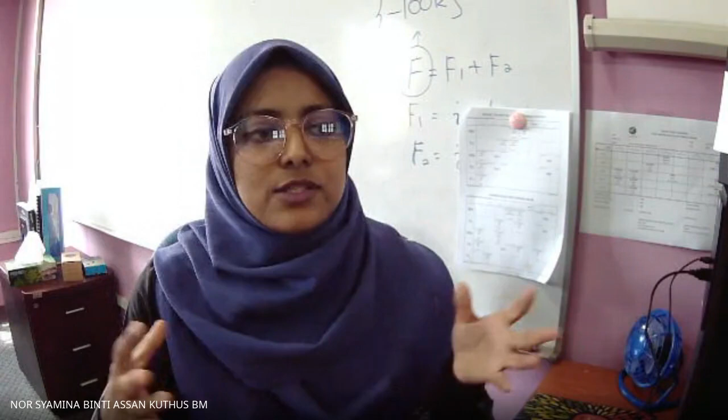Other than that, apa yang kita akan buat dekat bengkel-bengkel, dekat workshop adalah kita akan pergi bengkel mechanical untuk buat welding. Kita akan buat arc welding, kita tak buat gas welding. Lepas tu kita insyaAllah akan buat DC circuit ataupun AC circuit punya eksperimen. Dan untuk civil kita akan buat slump test. Slump test itu nanti dia boleh lah bancuh konkrit, main dengan semen awak tu, dan kita akan buat slump test.

Ini secara keseluruhan what we're going to do for this semester. Okay, so any question nak tanya?

Okay, sekiranya awak tak ada apa-apa barang untuk LK ke apa pun, don't worry, sebabnya kan kita ada space hopefully. So kita akan buat bilik LK. So bilik LK nanti kita bolehlah gunakan whatever instrument yang ada dekat situ untuk okay. So next week kita akan jumpa di bilik LK.

Untuk hari ini saya bincangkan teori sahaja dulu. I'm just going to explain to you the theory of mechanical drawing, which is using drawing section views. So next week apa yang kita akan buat adalah kita akan, apa yang kita belajar hari ini kita akan praktikkan minggu hadapan. Boleh?

Ada apa soalan? Tak ada? Ready? Nak belajar? Ready, Miss. Ada tak antara yang ada dekat sini pernah buat mechanical drawing?

Saya rasa pernah belajar dalam form 5 kot rasanya section views tu kan? Ada tak yang pernah belajar? Tak pernah buat section view, you know what is section view, you know what is mechanical drawing? Belum. Ya, apa dia? Apa dia? Siapa cakap betul ni? Dia punya speaker ni, dia macam bergema sikit. Jadi awak punya cakap kena clear sikit. Okay. Tak pernah lagi, Miss. Benar, okay. Okay. Kita

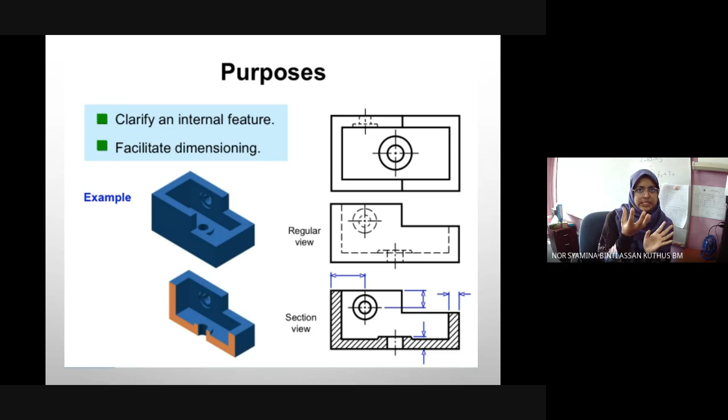Jadi itulah yang kita nak buat. So bezanya, kita tengok apa beza antara orthographic view dengan tu. What is the purpose? Obviously to clarify internal features dia and also to facilitate apa-apa dimension yang diperlukan di bahagian dalam. Contoh kat bahagian dalam tiba-tiba ada a part that is hollow ataupun a part that needs to be clearly fill ke apa, so kita nak tahu exact dimension ke. For that, we can use this section views. Purpose nanti tidak lagi saya tunjuk.

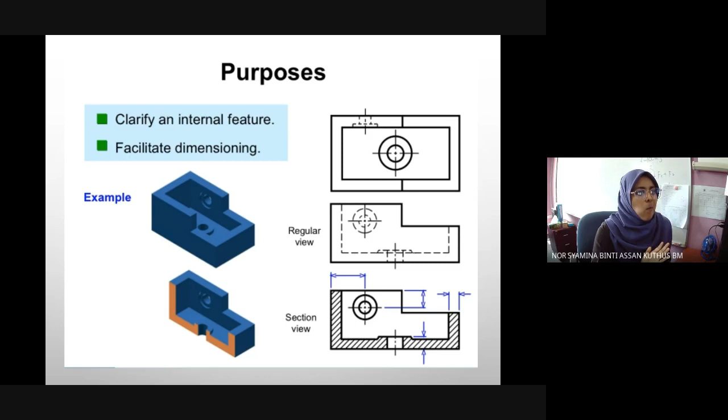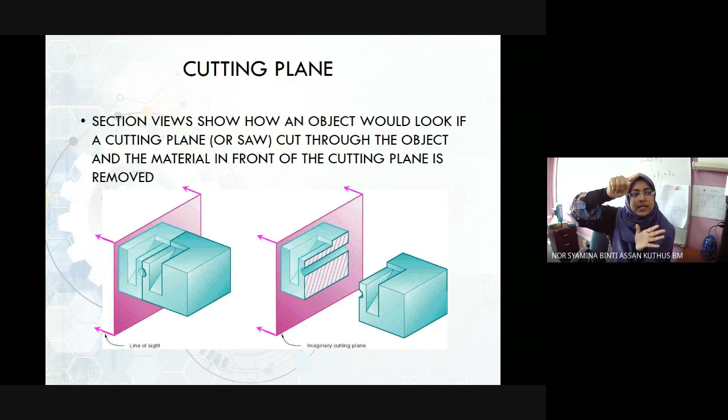Okay, senang. Untuk bila mana kita buat section views, we would actually have a cutting plane. So cutting plane ni adalah imaginary plane sahaja. Now in this slide, what they are showing you is how would we view the object bila mana kita nak lukis. So contoh kita ada objek dalam warna hijau tu kan, objek hijau itu and we are cutting through the object.

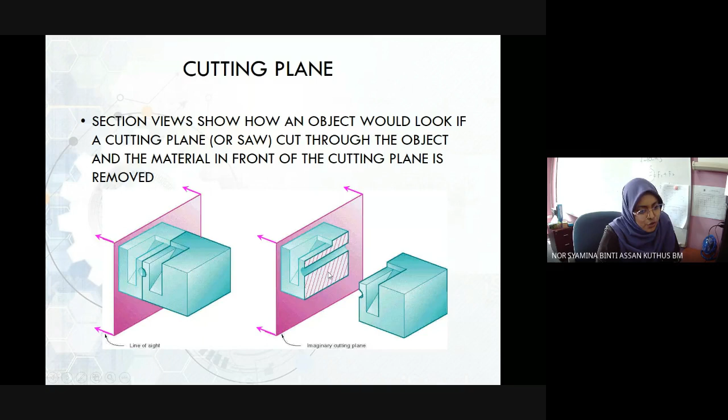So cutting through, where we are cutting through is what the pink color panel itu sedang tunjukkan itulah. So this pink color panel, nampak ke saya punya mouse? Yang ni okay. So yang pink ini adalah seolah this is where we are cutting. So after we cut, this is how kita tengok daripada sini tengok arrow ini, this is how we look at our object. So that is what will be drawn. Itulah yang akan kita lukiskan sebagai salah satu section view. Okay, bukan side view, bukan front view, tetapi section view.

Alright. So cutting plane ini sebenarnya imaginary sahaja. So we just imagine that we're gonna cut through, we're not gonna like literally cut through. So dia adalah imaginary plane yang di mana we assume that is where we cut through and we are going to obtain our section view. Alright. So cutting plane ini boleh berlaku in any direction. Obviously kita tengok pada kita punya intention, kita nak tengok which internal features yang kita nak tengok. So based on that intention, based on our objective, kita akan dapat cut through dan we can actually place our cutting plane line itulah based on where we need it.

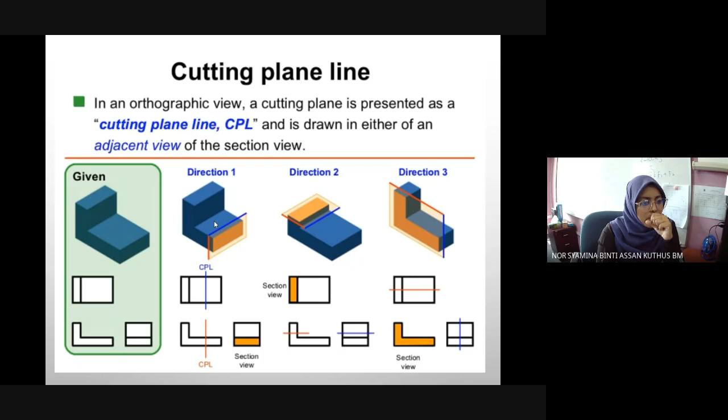Okay, section line technique. So apa ini section line technique? Bagi balik depan, okay, nampak tak? Bila kita lukis yang hijau ini, nampak belah kiri ini when we are drawing the side view. Okay. Front view, kita tahu dekat dalam dia ada bahagian yang hollow. So dia akan represent that particular part which is inside, which is hidden, menggunakan dotted line.

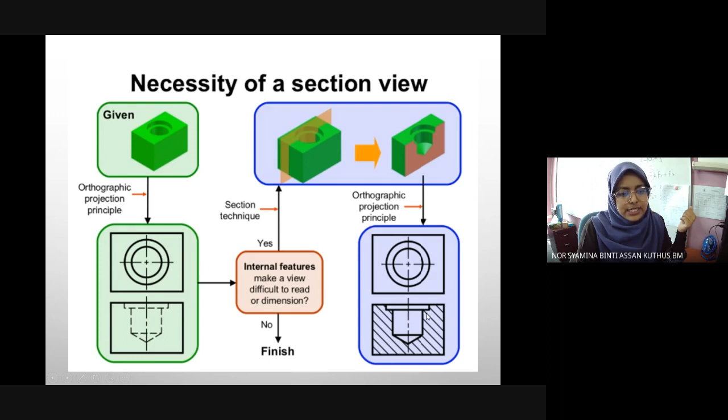Betul? So what happens after we cut a section of the object, to indicate that is a section view, to indicate that is the part that we cut, kita akan menggunakan this shaded lines. This is called section lines. Nampak line ni yang dilorek-lorekkan ini, this is section line. That is to indicate itu adalah part yang di mana kita potong. That is where the cut has taken place.

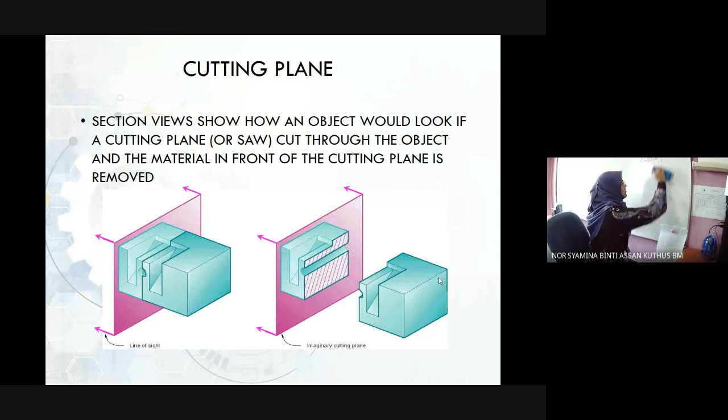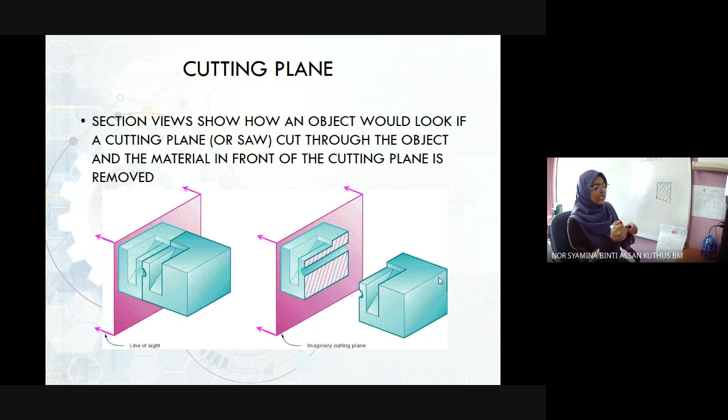Faham? So nak lukis dia pun bukannya sekadar kita tak boleh nak assume. Okay, kita boleh nak assume kita lukiskan objek kita dan lorek je sehati kita, lorek je. Tak boleh macam tu. Dia ada dia punya method, dia ada dia punya style, dia ada dia punya angle that we need to follow. Kalau salah, the whole thing. Okay? Alright.

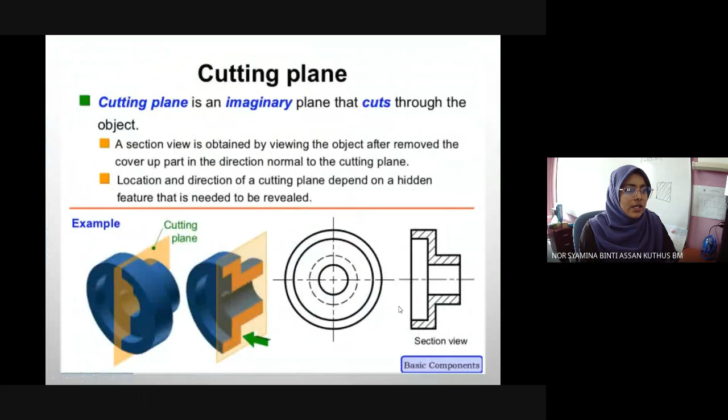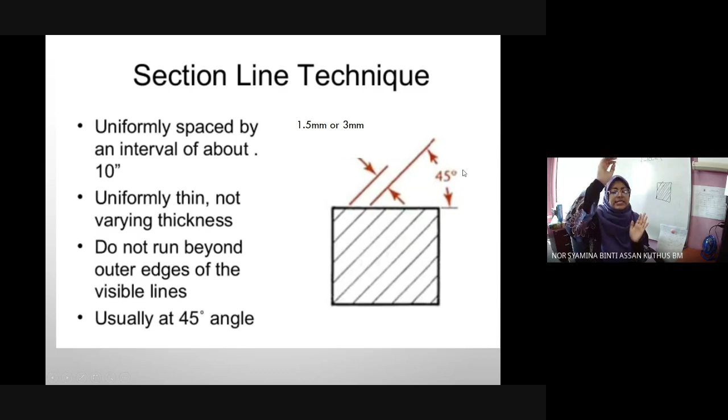If your object is very small, then your section line interval should also be small. If our object is big, we can use 3 mm. And the angle that we want to draw must be 45 degrees.

It's not restricted to 45 degrees only. Later we'll see there are conditions where you can change from 45 to 30 degrees or 60 degrees, but there are other conditions. Your first priority is that the section line must be a very thin line.

There must be a difference between your section line and your object line outside. These are your object lines, the darker lines, the bigger lines, the visible lines. The outer ones are object lines. There must be a difference between this object line and the section line inside.

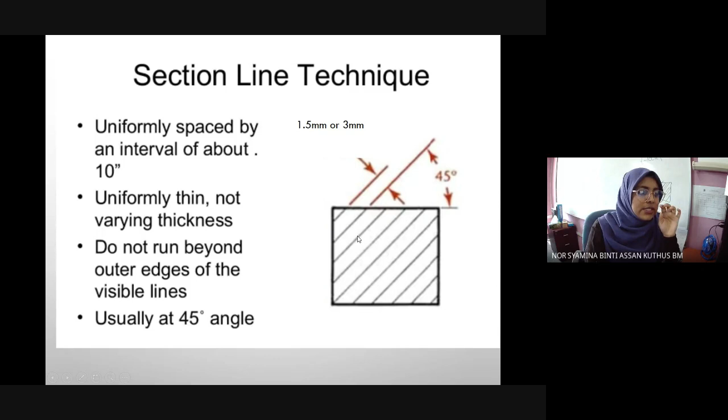It should be very clean. The first thing when we are doing our engineering drawing, your paper must be very clean. Your drawings, your lines should be very precise and clear.

If you want to know, because you submitted your LK SEM 1 answer as a soft copy, not hard copy, maybe I did not pay much attention to the cleanliness of your paper and neatness of your line and everything. But this time I will make sure when we do face to face, I would be able to see and tell you exactly if your lines are not clear, not precise, not nice, if it looks smudgy, if your paper is smudgy, not clean - all of that is wrong in engineering drawing.

Your line must be very crisp. It cannot, at the end, come out a bit like that when we have an object line - the intensity of the line must be the same, the lightness of the line must be the same. All of that matters, you have to be very careful.

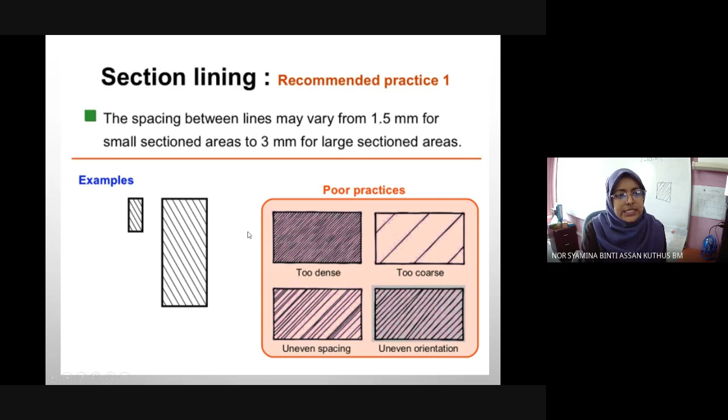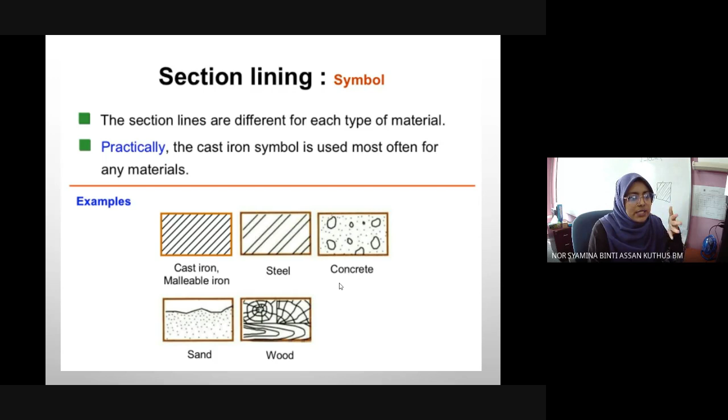For steel, when you study structural analysis or similar, all of this is in materials - you will learn later to indicate the differences between types of material. In any engineering drawing, we will use these particular symbols, but we will only use the basic, common section line lining.

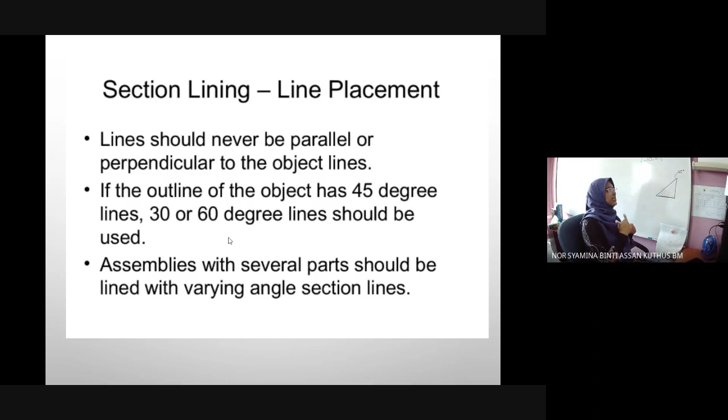This particular object line is already at 45 degrees, so then we can change the section line inside to either 30 degrees or 60 degrees.

Okay, and another thing is when we want to change the angle, we must also change where we are placing the lines, because the line should not be parallel to the object line. We cannot draw it straight like that - we can change it.

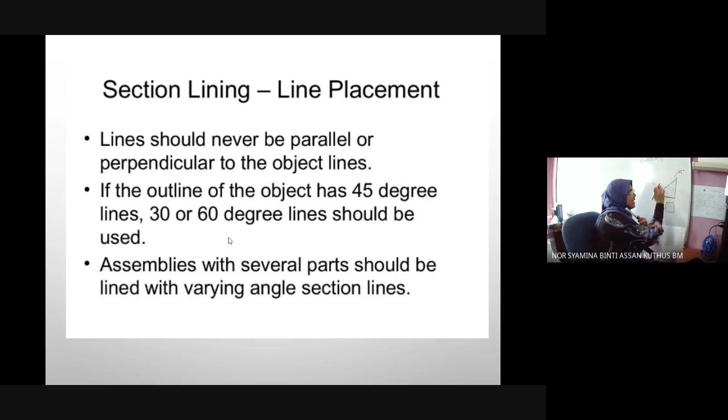Like this. Can you see? This particular line is not parallel to any object line. It's also not perpendicular to any object line. You see what I'm saying?

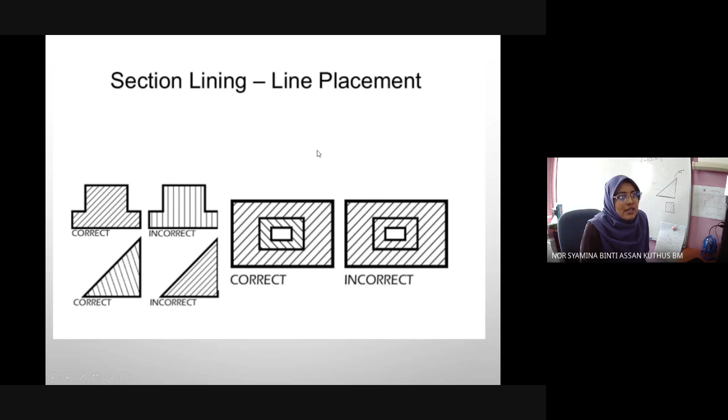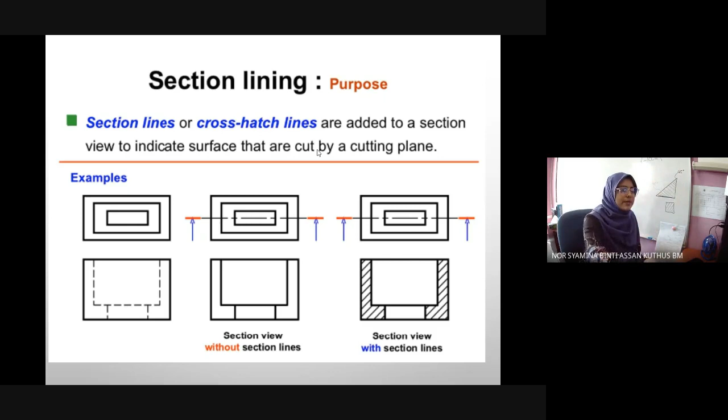Okay, so next, the purpose of why we need to draw section lines is to indicate the surface that are cut. We need to know where the cut has happened, where is the area that will be cut. That is the big idea.

Okay, siapa? Ini lagi contoh. Should not run parallel and perpendicular. Contoh macam ini, macam ini. Boleh, nampak?

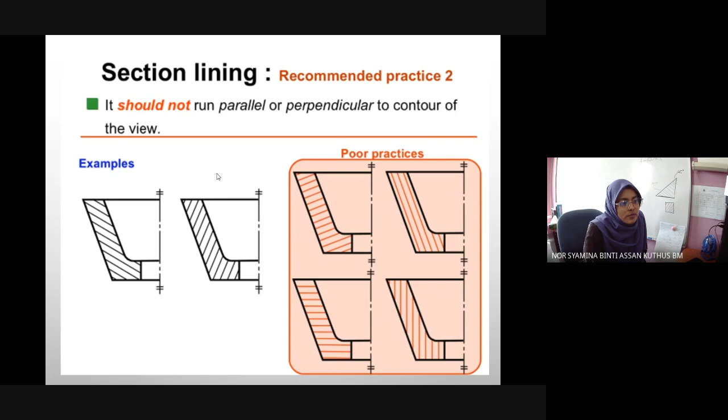Ini ada lagi contoh. Contoh lagi.

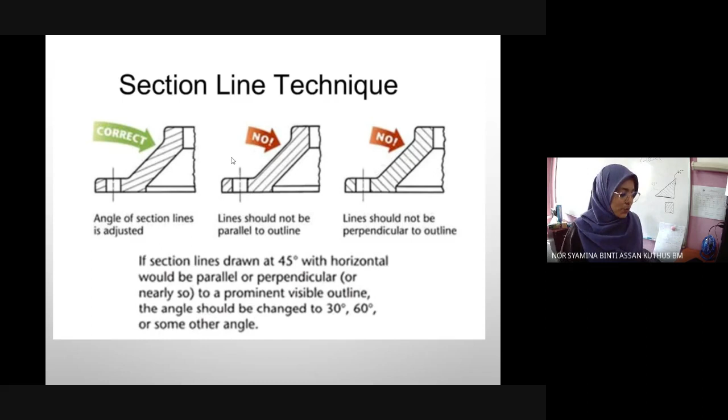Alright, so apa yang kita belajar tadi adalah what is section view dan apa yang kita perlu buat untuk indicate those section view. Now, what we're going to do is look at what types of section cuts there are. Berapa banyak jenis yang ada? Yang kita akan belajar sekarang adalah 3 sahaja.

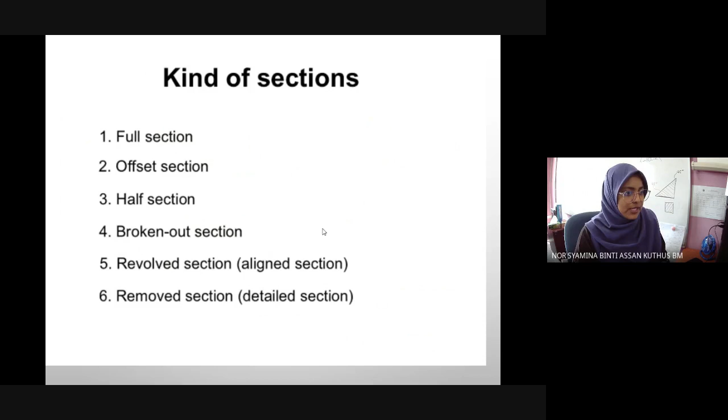Full section, offset section dan juga half section. So what is full section view? Full section view itu adalah di mana we have an object, we cut through the whole object. Kita terus potong straight macam tu dan kita tengok apa yang ada dekat dalam. So ini adalah full section view.

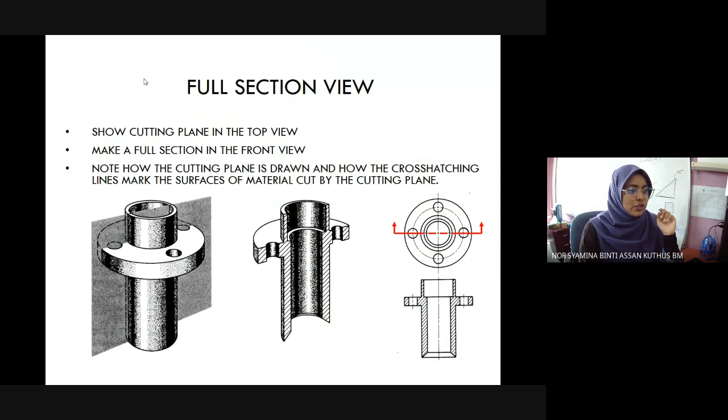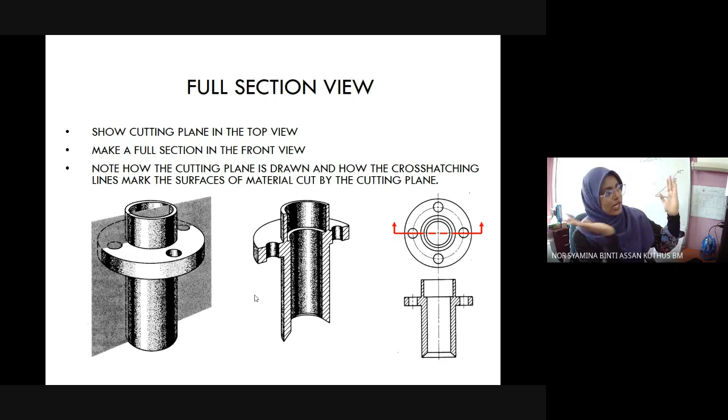Contoh, so we cut through straight. Tak ada kona-kona, kita tak pusing. Kalau ada pisau, contoh kita ada cake, kita potong straight, half. So kita tengok apa yang ada dekat dalam. Alright, ini full section view.

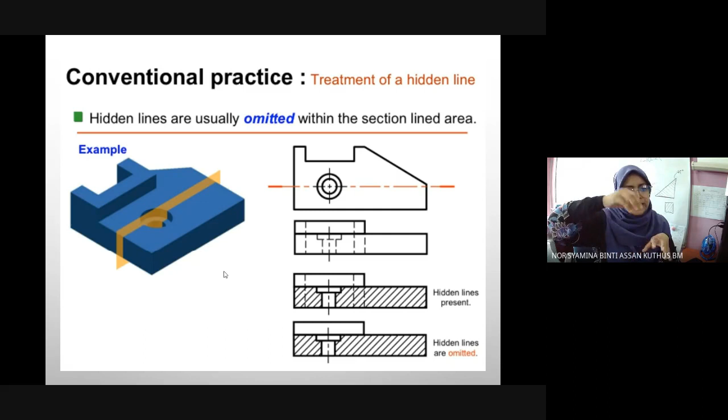Another one adalah, okay semua nanti saya akan tunjukkan waktu kita buat hands on. So bila kita dah potong, contoh ini, hidden lines are usually omitted. Nampak tak kita ada satu objek? Bila kita buat satu full section, sebelum itu, if we are going to view from this side, let's say ini adalah front view, kita tahu there's a hollow part.

Bila kita lukis that front view in our orthographic view, kita akan lukiskan dia sebagai hidden line, betul tak? Tetapi when we are drawing our section line, our section view, logiklah kan. Tadi dia hidden sebab kita tak nampak dia ada dekat dalam. Sekarang kita dah potong. So hidden line itu semua akan hilang. Faham ke?

Inilah maksud dia kat sini. Hidden line ini tidak perlu ditunjukkan. It's not needed. We can see this part. So tak perlu. Faham ke?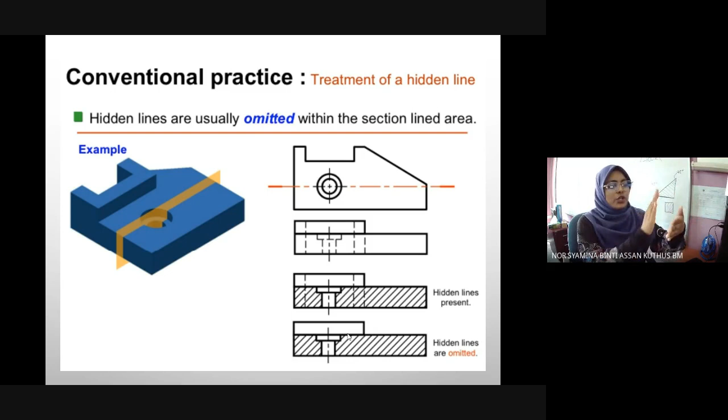Nampak, indicate daripada yang belakang, nampak tak? Ini part yang belakang punya hidden line pun tak perlu tunjuk. Faham ke? We are not going to view the whole view. Kita cuma nak tengok part yang kita cut sahaja. That is the purpose of drawing section view. Kita bukan lepas potong pun kita nak tengok semua details dekat belakang-belakang. No, we only going to see the part that we cut. Itu maksud dia dekat sini.

Alright, next. Ini contoh lagi full section. Another one type of section view adalah half section view.

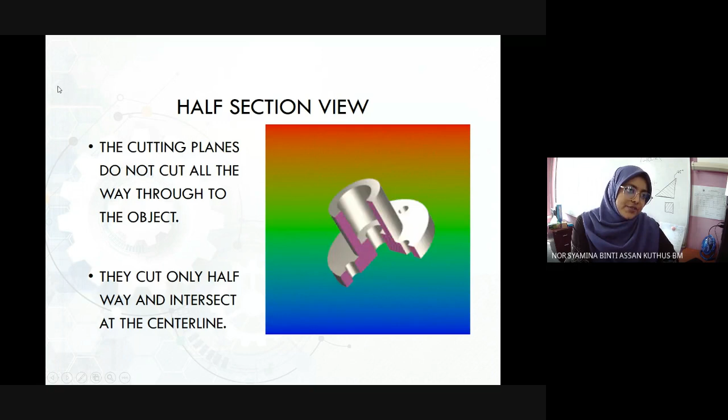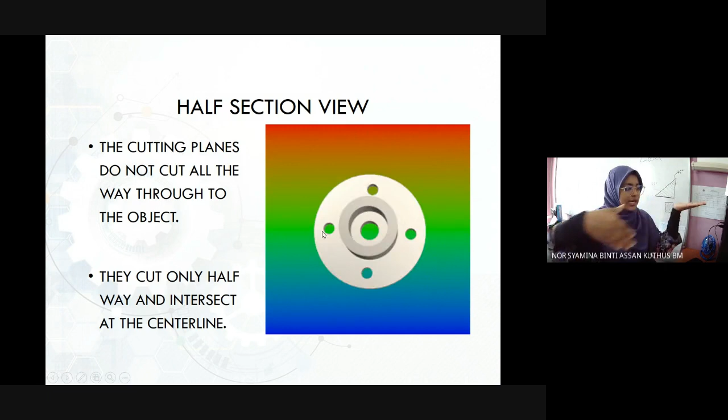Half section view ini hanya untuk symmetrical object. Ini contoh, nampak tak dipotong dekat mana. Dia tak potong keseluruhan. Okay, contoh kita ada kek. Ada kek tak? Okay, kita ada kek, maksud kita nak potong. Kita potong kek, kita tak potong straight.

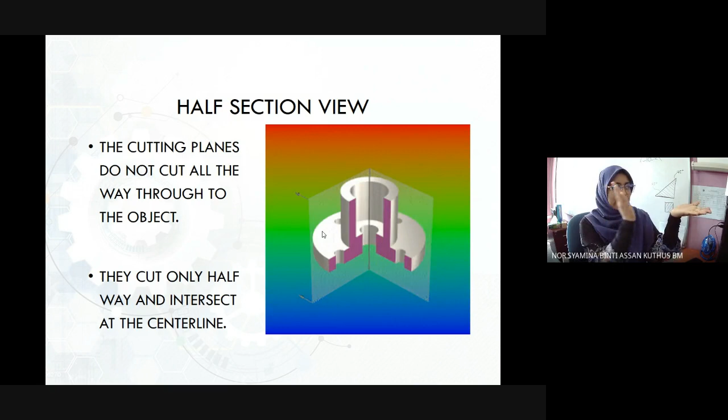Kita potong just a quarter of it, betul tak? Potong sini sikit, sini sikit, a slice kan. Samalah half section ini pun, kita ambil, kita keluarkan a slice of it dan kita tengok apa yang ada dekat dalam. But this cut can only be done for symmetrical object.

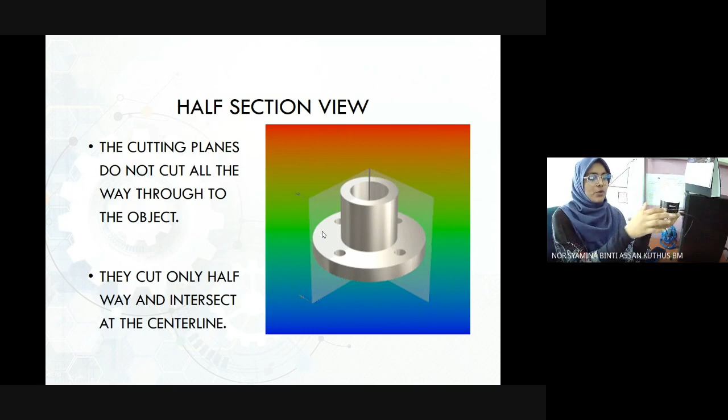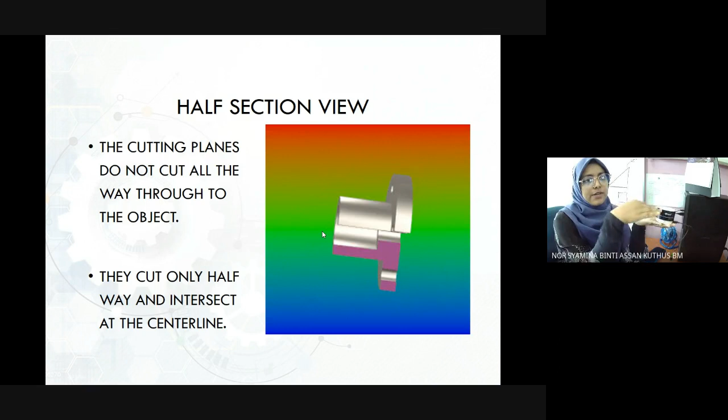Bermaksud saya potong, contoh nampak ini. Kalau ini symmetrical kan, saya pusing macam mana pun dia tetap benda yang sama. So potonglah belah sini, a slice this side. The section view will still be the same kalau saya potong belah sini pun. Itulah half section, nak kata it must be symmetrical punya object.

Ya. Contoh, symmetrical punya object, tapi dia cuma ambil section of it. Nampak this red line ni? This red line indicates where the cut has happened. Okay, this is where the cut has happened.

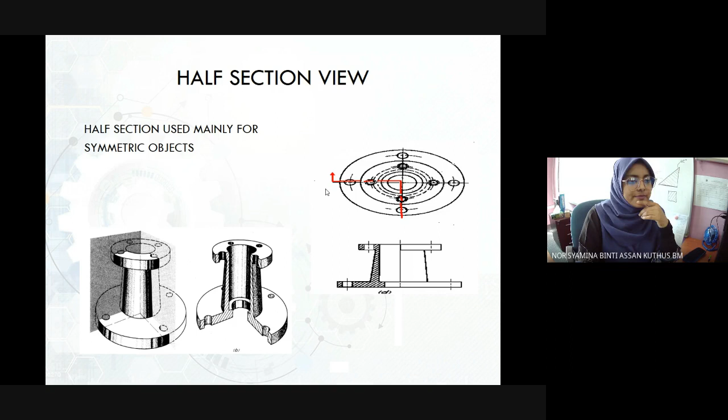Clear? Alright, ini contoh satu lagi. Mana it's been cut, the cutting plane is this side, dia potong begini. So the section view adalah halfway sahaja dan kita keluarkan a quarter of it.

Center line is something we use to separate. Like this example here, this is a section line. Per section line we will have a center line. Center line is to indicate where the cut has happened. For half section it is very important because it's symmetry, so we need to know the center point used to cut the object halfway. So you need to indicate it with this red color line.

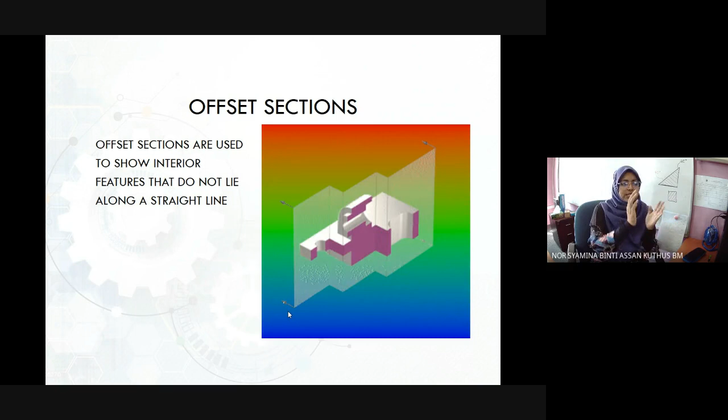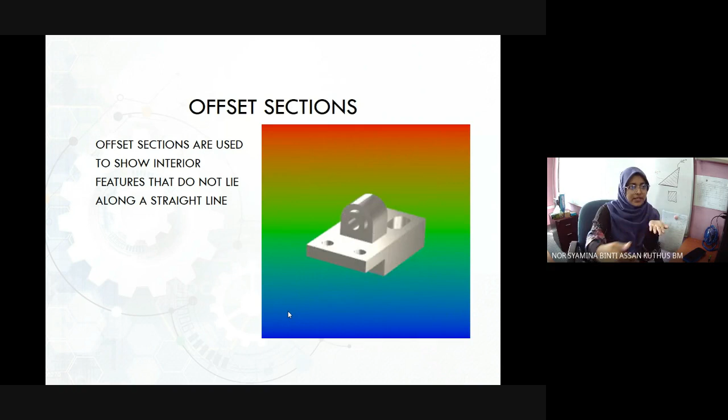Okay, another part is offset. Let's say we have an object that is not symmetric and its internal features are not only at the center. So we need to make a cut where it's not straight, and we also cover every internal feature. After we have done the cut, we will be able to see what's inside.

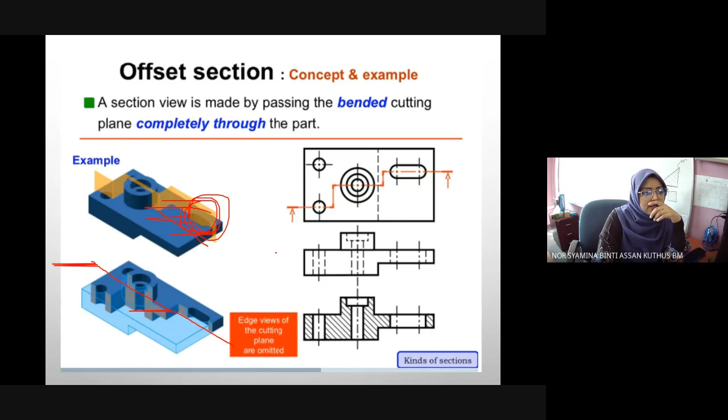But if we cut straight like that, we will not be able to see a few of the other parts at the back. If we cut here, we don't see this hidden part. That's why, depending on certain functions or certain machines or objects, we make an offset section. Is it okay so far?

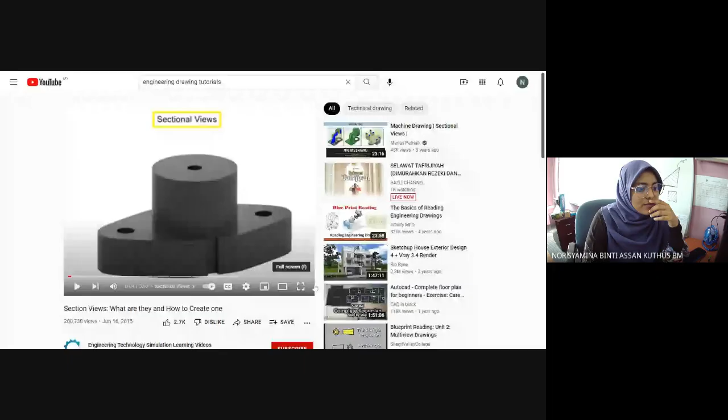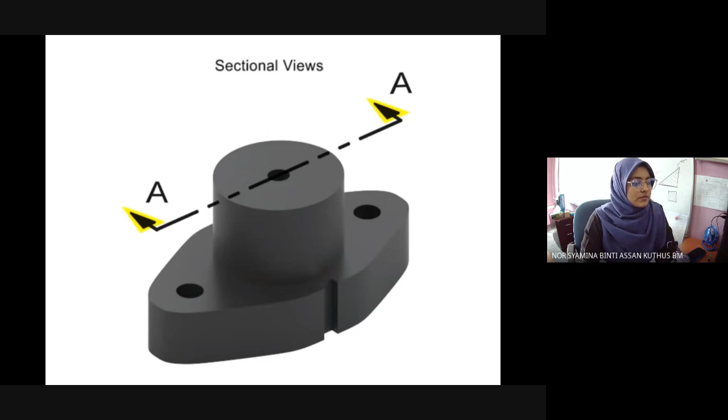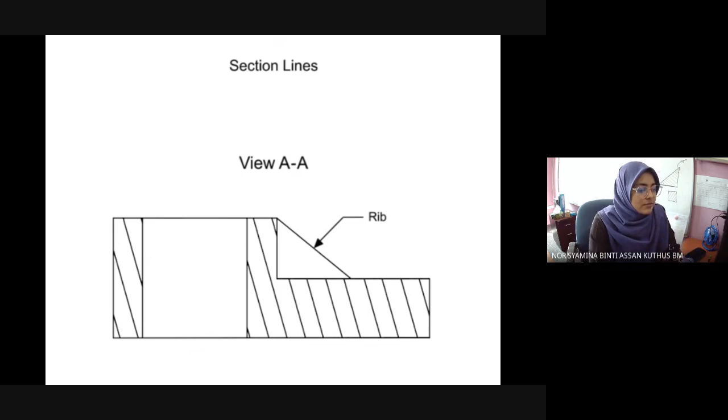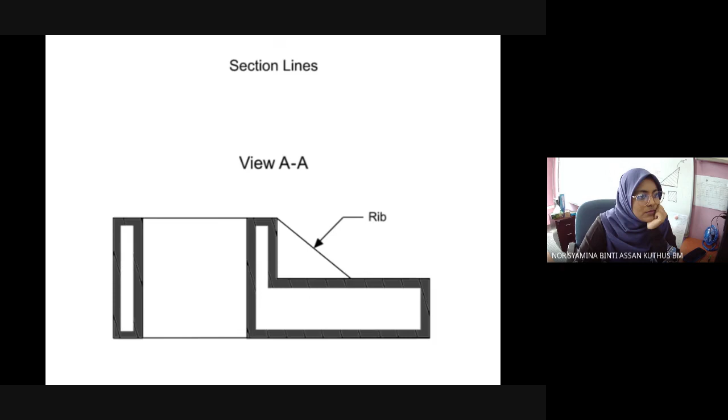The interior of a part that's difficult to understand from looking at typical orthographic or isometric views. They are also very useful in dimensioning the drawing. Sectional views allow us to dimension the interior of a part without dimensioning to hidden lines, which is considered a poor convention. A sectional view is made through an outside view. To make the section, imagine a plane cutting through the part. The cutting plane is indicated by a line with arrows called a cutting plane line. The arrows on each end indicate the direction you view after the cut is made, and are typically labeled with letters that identify the new view. Once an object is sectioned, pattern lines called section lines are added to indicate the remaining material. Only the material that has been cut or sectioned is given patterned section lines. Some exceptions to this rule are for parts that are thin, or parts where the addition of section lines would be confusing, such as webs, ribs, and spokes. In this illustration, the rib has not been given section lines because it is thin with respect to the surrounding material. Additionally, the hole is not given section lines because the hole is empty of material. Additionally, if a drawing is clearly illustrated, section lines are sometimes only drawn along the visible lines along the exterior of the sections. Large parts are often drawn with outline sections. There are a number of different types of sectional views that can be drawn. This is a full section view, generated when the cutting plane passes through the entire part.

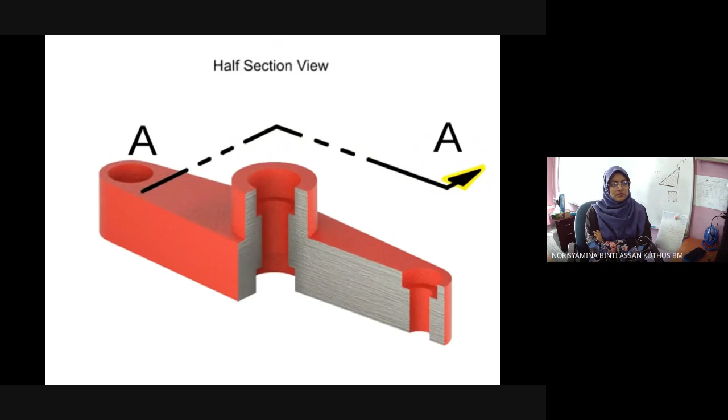Half-section views are created when a section is taken from only one half of a symmetrical object. The cutting plane line for this type of view has only one arrow, since you are only viewing the section on one half of the object. One half of the new view shows the section, and the other half shows the original view.

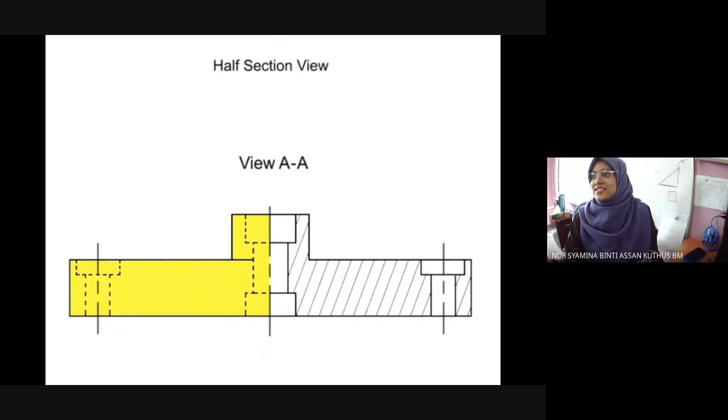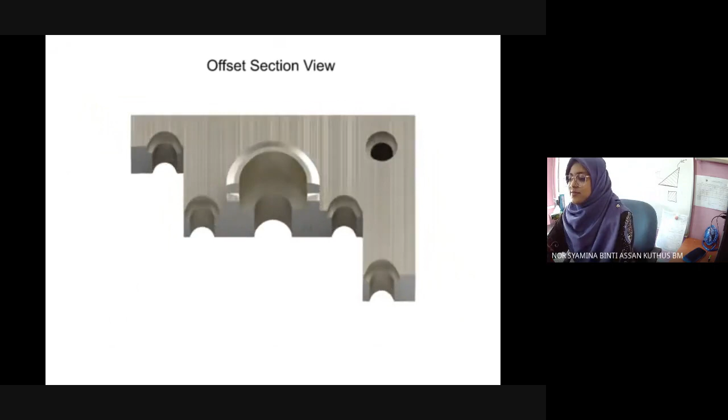An offset section results when the cutting plane line is bent to show internal features that are not in a straight line. The bends in the cutting plane are not shown in the section view. The new section view makes the internal features appear as if they are in a straight line. It's important to remember that they are not. The section view is created to illustrate the interior features of the part.

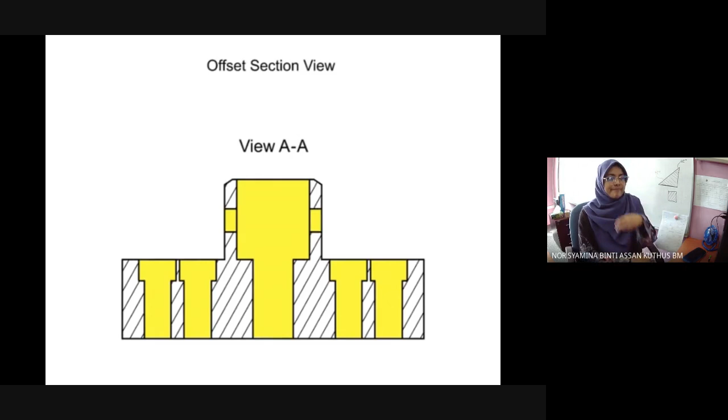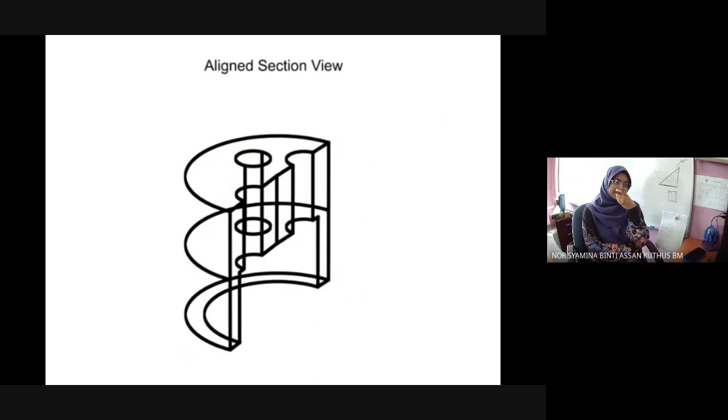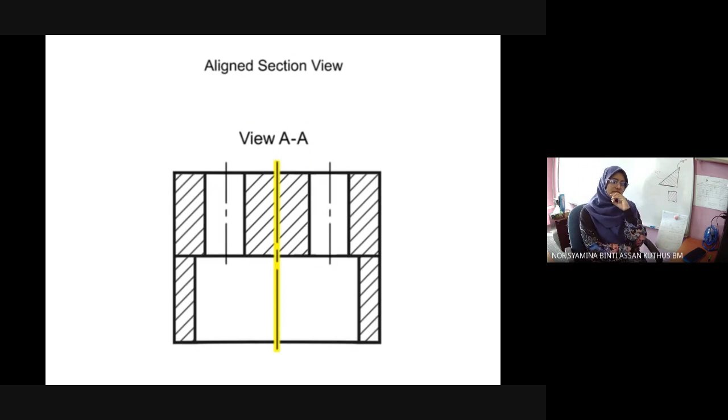Aligned section views occur where the cutting plane bends to pass through specific features of an object, then rotates to a normal vertical or horizontal plane and is projected to the section view. For circular parts, the cutting plane will almost always pass through the center of the part and then angle to another feature. Aligned views are typically used with complex or circular parts with interior features that do not appear in a straight line.

As with all section views, to avoid confusion, ribs, webs, and other thin parts such as the spokes on a wheel are not shown with section lines.

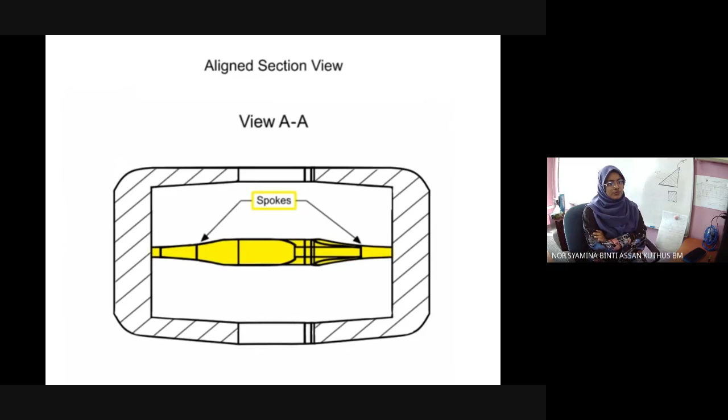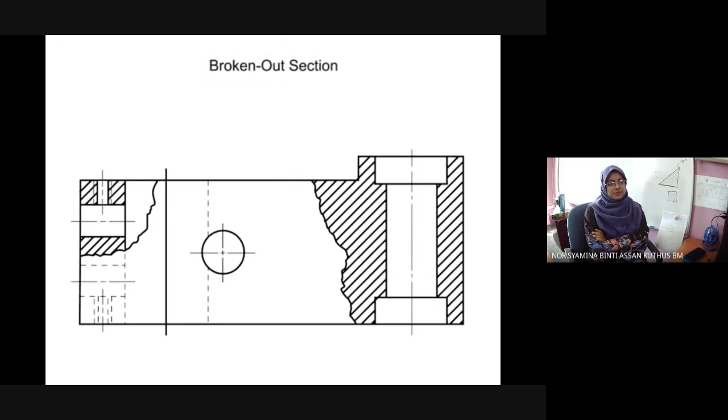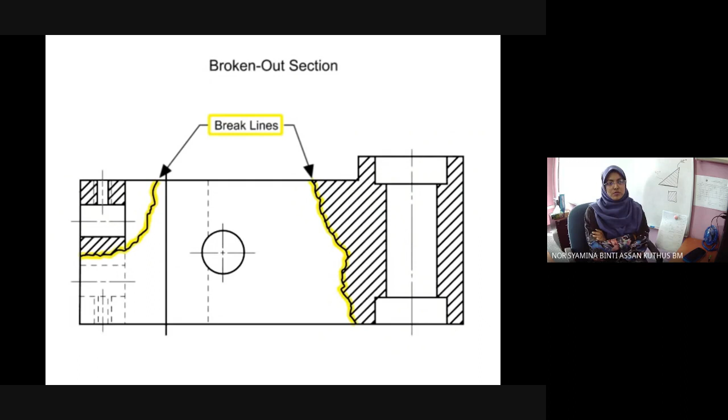Broken out sections are used to show the interior details of a specific feature of the object. A small portion of the part is sectioned to show interior details. A freehand break line is used in lieu of a cutting plane line to indicate a broken out section. Typically, hidden lines are omitted from the broken out section view. Additionally, the section is not shown in a separate view. Instead, the original part is drawn as normal and the section appears in the regular view.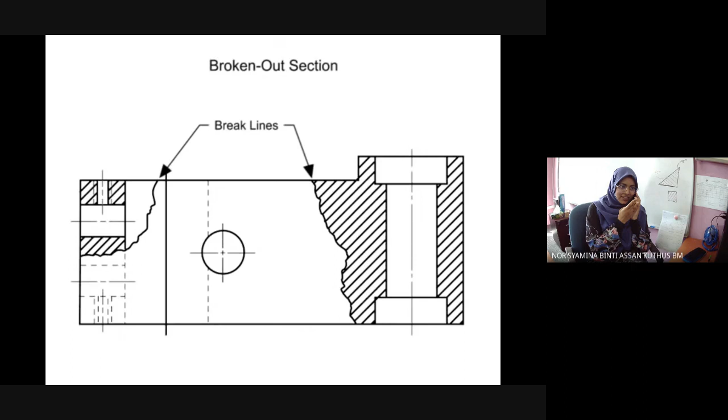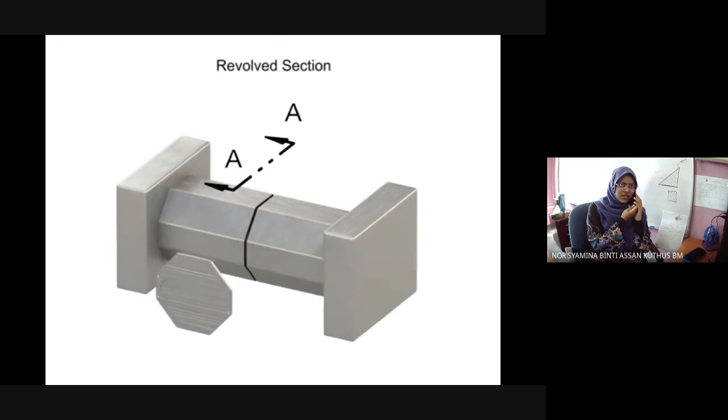A revolved section is created when the cutting plane slices through the feature, but the cut shape is rotated 90 degrees and shown directly on the regular view. Sometimes the new section is shown without breaks, and sometimes it is shown with breaks.

Removed sections are actually revolved sections that are moved to another location on the drawing. Removed sections are used when a part, such as this connecting rod, changes in cross-section from one point to another.

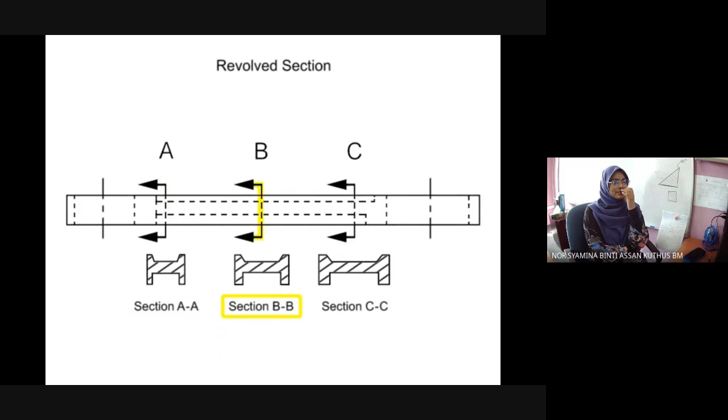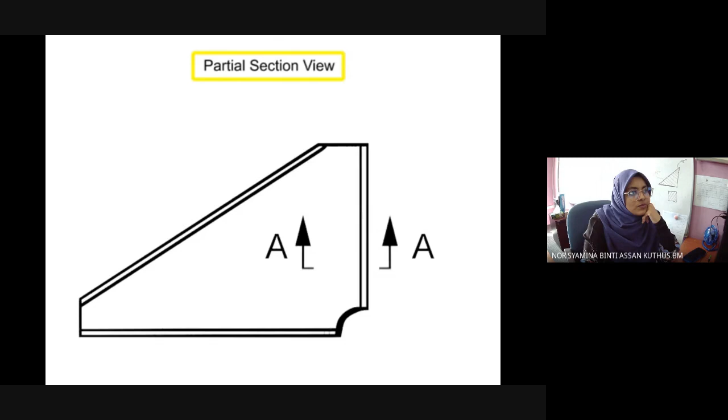A partial section view shows detail of an object without drawing conventional views. The cutting plane line only partially cuts the object, and the section view ends with a short break line to indicate where the cutting plane ended.

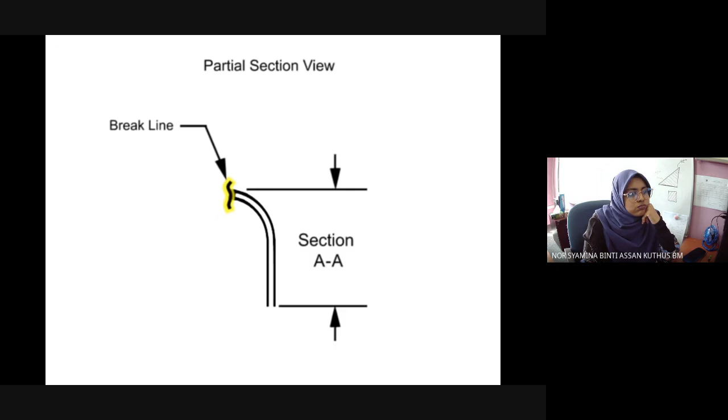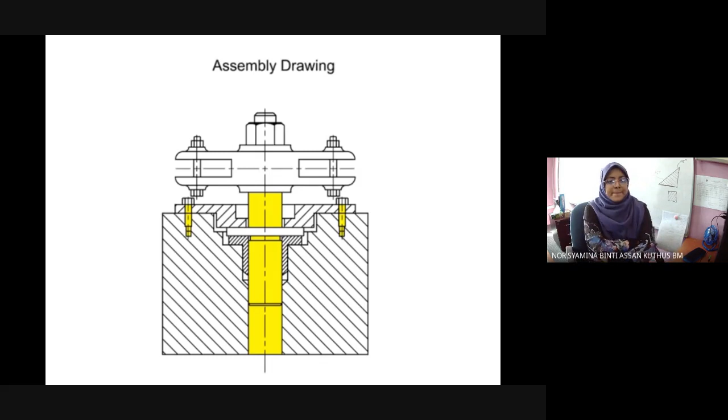Assembly drawings use section views to show interior subcomponents that may not be otherwise seen from conventional views. Balloon numbers are used to help identify each component for the parts list. To avoid confusion, fasteners and shafts are typically not sectioned in assembly section views, even if the cutting plane would normally reveal them.